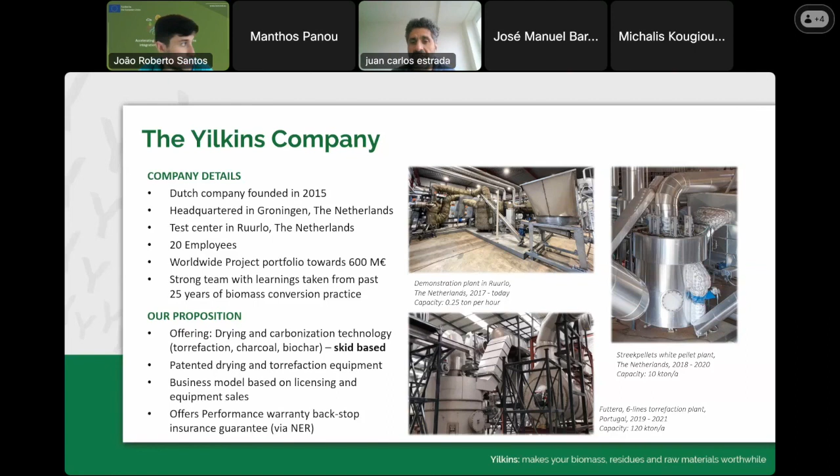And that means the large experience at a theoretical and technical level of our technical team, and also at the commercial side of the entrepreneurship with our CEO. You can see the most important of these two founders is the really long background in the sector, foremost in the biochemistry industry. I think Patrick Bergman must be nowadays one of the world leading authorities in terms of torrefaction and also other kinds of thermal treatments and combustion processes.

So the base of the company is a really large career in building knowledge about the processes and the type of projects we are engaged in. These are some of the patents that are linked to our technology. Everything has to do, as you can see, with thermal treatments at different levels, foremost torrefaction, but we are also developing paths in gasification. We are also experts in drying. Everything starts with the drying processes.

And a small overview of the commercial developments of the company. As you saw, we started in 2015 and until 2017 we were developing the prototype of the technology, and after that we started immediately to work at commercial level. First of all, with a small project in the Netherlands. Afterwards, in Portugal, it was our first large commercial project. We have commissioned successfully 6 torrefaction lines in this project in Portugal.

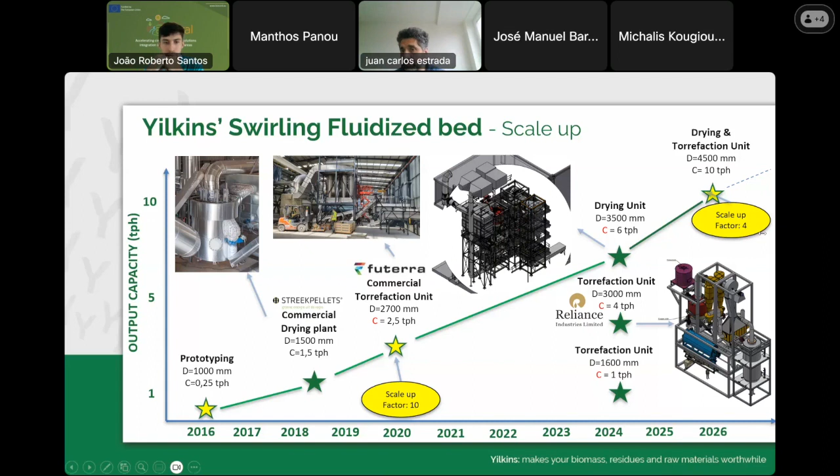So as you can see, one of the big challenges for these kinds of still new technologies is the scaling up process at commercial level. But you can see that for us it's already working pretty good. We went in 2020 from a factor of 10 and now are going to a factor of 4. So that means the scaling up process is going as smooth as it can be, and we are really happy with that.

What is the real core in the business of Yilkins? Of course, once again, thermal processes. Everything is about the chemistry. We are trying to master the process to apply the thermal processes in order to really improve the chemical and physical properties of the products, trying to have the most control of the whole process in order to achieve successful projects also at commercial level.

Well, you can see here the principles we want to create by mastering temperature and time in an oxygen-free, safe operation system, also based on a fast heat transfer. We are aiming to achieve a uniform product quality and to have full control of the process conditions. And this is also helping us to prevent a lot of fouling, one of the challenges of this kind of technologies. And everything is based on the drying and torrefaction technologies.

Reactors and dryers, which create the possibility to do this by combining fluidization at high speed of the biomass or organic waste streams in combination with flue gas in the reactor. We create a really efficient interaction which helps us achieve the faster heat transfer properties of the process.

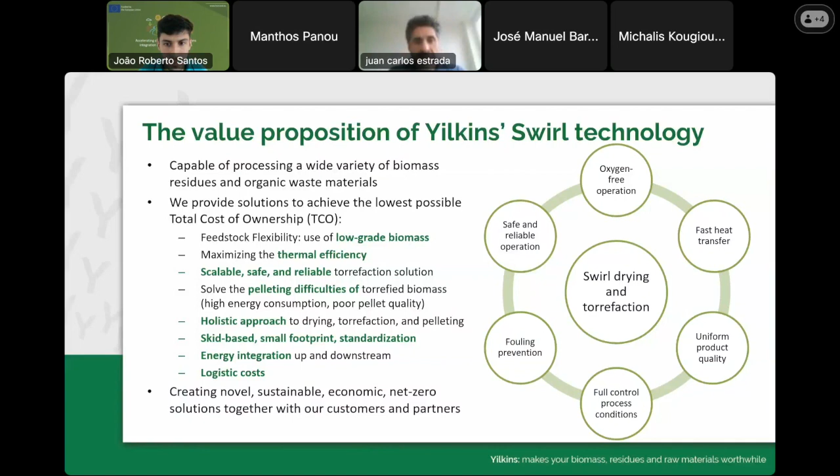Torrefaction. We are promoters, and we are still defending the concept of torrefaction, which has not the best international reputation because of a number of failures at commercial or technical level with that kind of concept. But we are pretty sure in Yilkins that torrefaction is still really a good concept. And once again it has everything to do with chemistry. We are trying to improve the property.

Going also through gasification, I think is one of the driving motors in the last couple of years and months; the interest and the investment potential going through gasification is growing enormously. And in that case, torrefaction becomes a kind of pre-treatment step for the gasification station. And you can see you can go for some of the highest value products like biofuels for aviation, like biofertilizers, like green steel, like green hydrogen, you name it. So the opportunities that this technology opens in the value chain are really quite interesting. So we are trying to engage in all of them, depending on the situation, the client, the feedstock and the concrete production circumstances.

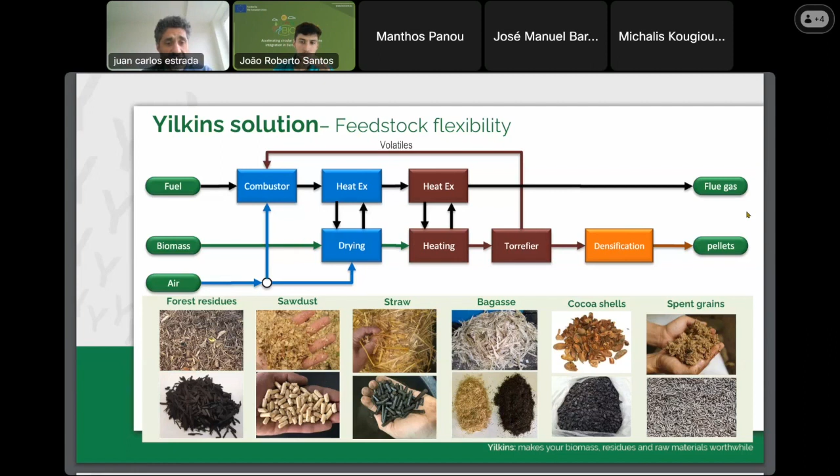Torrefaction is the improvement of the chemical and physical properties of the materials, but trying to use the least amount of energy possible. So mastering the chemistry means mastering the time frame and the temperature frame in an oxygen-free environment in order to achieve every time, for every project, in a customized way, the best yield mass balance. It has everything to do with energy efficiency, with carbon efficiency. How do you apply this technology in concrete production circumstances in order to achieve the highest energy level for your project? And that means also the best economics of it. We already talked about the broad spectrum of feedstock that can be used for these applications.

The next one, Joao, please.

Now, you're going to see this schema a number of times. The only part that is not completely well described here is the drying. In our integrated concept, we have a two-step drying concept, which means pre-drying and main drying together. We aim every time to create a steam drying environment by using the moisture content of the biomass itself. So we are able to condense the moisture content at 100 degrees centigrade and reuse it in the steam. Also for energy purposes of the whole system, we create a steam loop, recovering up to 70-75% of the energy of the steam loop. So that is helping us a lot to achieve this kind of energy consumption rate, which I believe must be one of the best at international level. I think we don't have too many competitors with this kind of energy consumption level, just for the drying system in two steps.

After drying, of course, the steam loop is also helping us to create the oxygen-free environment, for drying as for torrefaction, because the steam is purging, pushing away the oxygen in the system. And that also makes the technology much more secure, much more safe for the operators, because we don't have any fire risk or explosion risk, because of the lower residence time of the biomass in the reactors, and because of the oxygen-free environment of the whole thermal process.

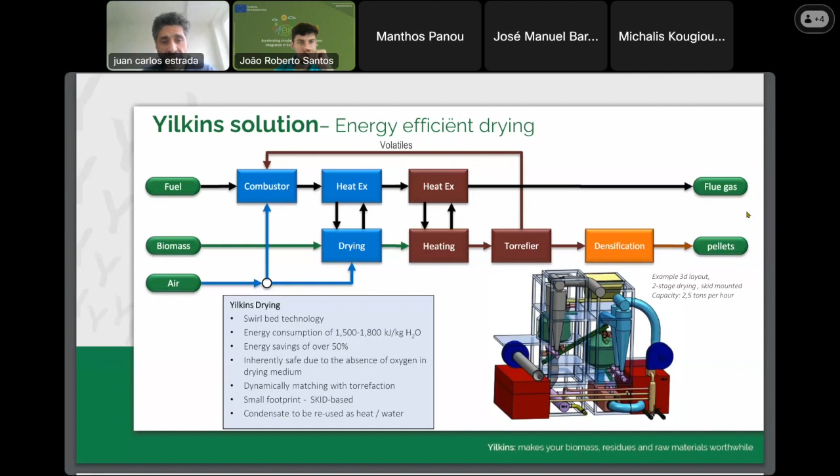The next one, Joao, thank you.

Torrefaction: we have also a two-step torrefaction concept. We use the reactor just for heating up the biomass, and we have also a residence chamber in which the torrefaction is really happening.

So for the scaling up of the processes, these two steps are really good, because the fast heating up process allows us to scale the technology without problem. Not everything depends on that process. This happens really quick, and we can also, in the residence chamber, take care of the proper torrefaction conditions in order to achieve the best mass yield balance for the process.

Why torrefaction? I was telling you that we are defending the concept of torrefaction. In our case, that means a temperature operating window between 280 degrees and 320. And to tell you an average, it must be 300 degrees average torrefaction temperature. Well, in this average condition I have been describing, we are able to achieve more than 75, in some cases 80% mass yield balance for the process.

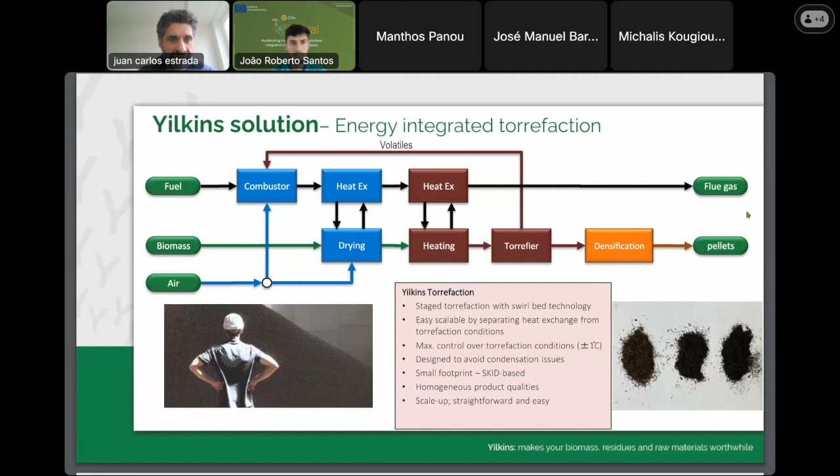The next one, Joao. Of course, for drying, for torrefaction, and including the combustion system of the whole integrated concept, we have our own patented technology, but we are also a kind of expert in pelleting, because we have been doing a lot of research and test work about the best quality for pellets using this technology. We have a structural collaboration with a couple of companies, one of the best reputed for the certification processes, for the pelleting process, but we don't have our own technology for that.

And of course, pelleting just depends on the whole business case circumstances. In most cases it's really needed, because it's the best way to achieve the best transportation logistics and the best way to work with the product in the end. But in some cases, when you are going to use the product immediately afterwards, pelleting could be not necessary.

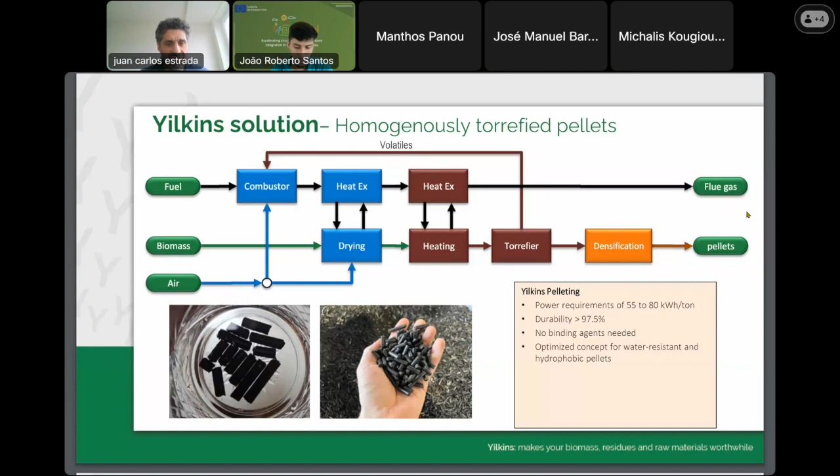So another important thing of Yilkins is we are trying to implement all these concepts in the most flexible way possible. When it's needed, it's needed, and when it isn't, it isn't. So depending on the project and on the whole value chain, the different steps can be applied in different ways. Even the drying can be applied not in 2 steps, but 1 step. And torrefaction can also be plugged into an already existing plant, etc. The next one, Joao.

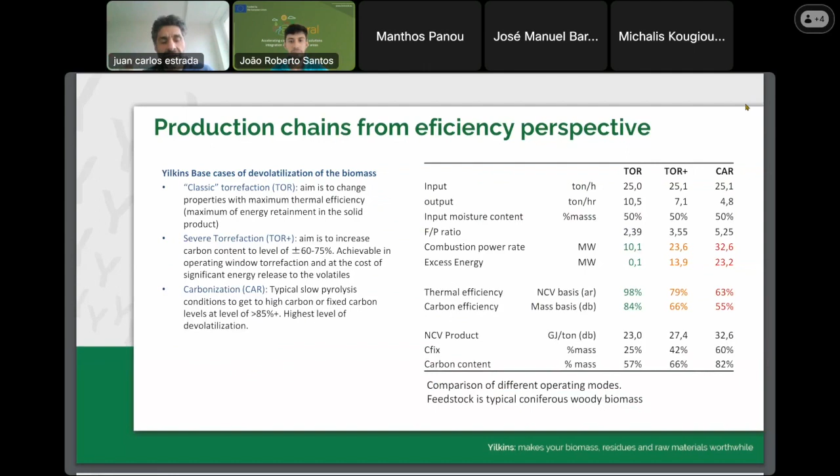And you also have to take into account the emission levels and also the feedstock rates. You need much more feedstock in order to produce just 1 ton of severe torrefied material or biochar. So in every single case, the balance of the whole business case is quite different depending on what you are aiming to achieve with the end product. But once again, classical torrefaction is, I think, by nature, one of the best balanced mass yield approaches to this kind of thermal process.

The next one, Joao, please. Well, of course, the whole logistics of the value chain. We are of course promoters of this one. If you are aiming to achieve higher levels of fixed carbon because you need it for your industry or for your commercial purposes, well, we believe more in this kind of concept, this kind of vision. We can apply torrefaction near the biomass because you're going to keep the carbon and the energy from the original biomass in your end product.

You can transport that product, and near the end use, you can apply severe torrefaction or carbonization as well. Because in that sense, you're going to increase the energy efficiency of the whole value chain, and not the other way around. So we are also at Yilkins trying to help design the best way to implement the technologies and to create the most efficient logistics in order to increase the energy efficiency of the whole business case.